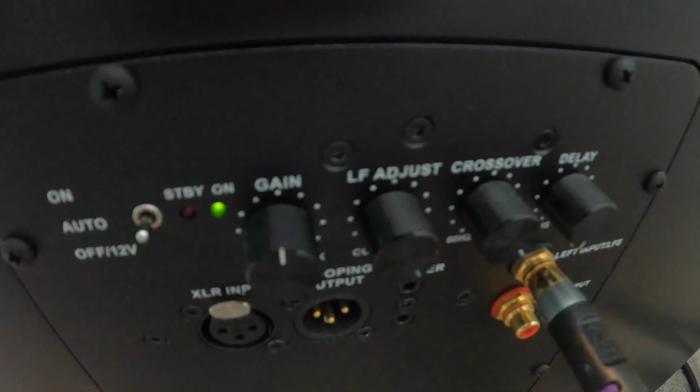So what I'm finding, and a lot of people have been complaining about, is a loss of bass when you run the Anthem. What I found with my Seatons, let me show you on the back of this one. On the back of my Seatons, I got this LF adjust. So if you bump up the LF adjust, if you boost it, it increases the output of the bass. And you have to decrease this when you run ARC, Anthem. You have to decrease this. I run it at flat, but then you can even reduce it more. This actually gives you more of a flatter response.

This boosts a little bit, and then you can boost it all the way up. So when you are running Anthem, it is sensing the increase in bass in the room, it's called room gain. And it was overcompensating, reducing those frequencies that were boosted in the Seaton. When I first got it a couple years ago, I didn't realize this, and I was just losing bass. Finally I learned, let me lower this boost, and then after ARC loads, then I increase it again, and it works fine for the subs.

So the Rel don't have that problem. The Rel are putting out a nice signal, a nice line. So Anthem doesn't give that problem, it doesn't have that problem. And the gain, you keep it pretty low on the gain, so it doesn't get as much room reinforcement. You got to make sure that you just dial down the gain on the subs. So when you dial down the gain on these subs, the room gain is lower, and it doesn't overcompensate on those.

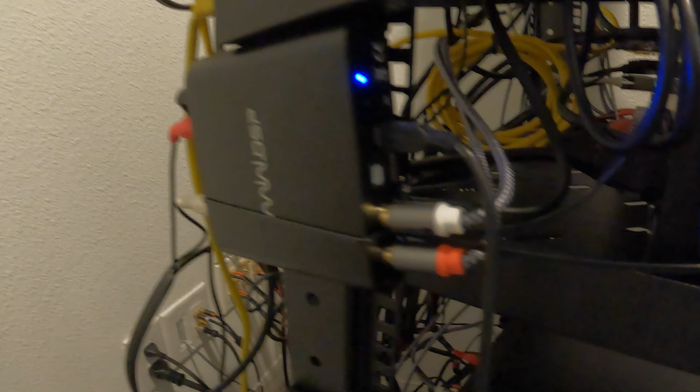So what I did - let me show you. I thought about it, and let me move my guy over. I put a MiniDSP in between the Anthem 1140 and my 525.

I'll edit the video and show you what I did. I boosted it on the parametric EQ - I boosted 10 dB at 50 hertz.

So what it does is create a line like that, and then it boosts the bass. And that worked - it brought it back. Now you can see on the REW graph, the bass is above, and that's what we want.

So I'm going to go ahead. What I think we can do is use the MiniDSP to trick the Anthem, because with the MiniDSP, from 100 hertz to about 500 hertz, the line is above the reference line. So we don't want that.

We want that line to be flat all the way, and then I want a little boost around 80, 70, 60, 50 hertz. So that's not a good curve - it sounds good, but I know it could sound better.

So I'm going to show you guys what I'm doing. I'm going to reduce the MiniDSP by 10 dB below reference, and then rerun ARC. My thinking is ARC will see that decrease in bass and try to restore it 10 dB - it'll bring it back up.

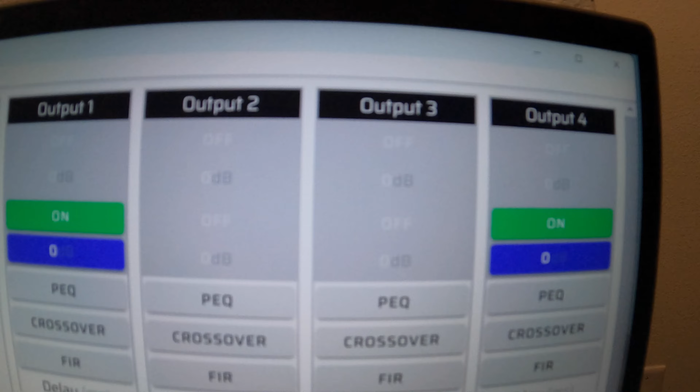There we go, parametric EQ and everything. So I have it on output 1, output 4, and I am using input 1, input 2. Since they're stereo speakers, I got input 1 on output 1, and input 2 on output 4. I just did it that way.

But anyways, so this is what I was saying. You got your PEQ for each, so I'll show you what I did. I'll open up the PEQ. So for the Martin Logans, as you can see, we're here at the 50 hertz. I did it just before, like a 49, 48, whatever it is. I boosted the output level by 10 dB, so that it would give 10 dB of gain to those frequencies.

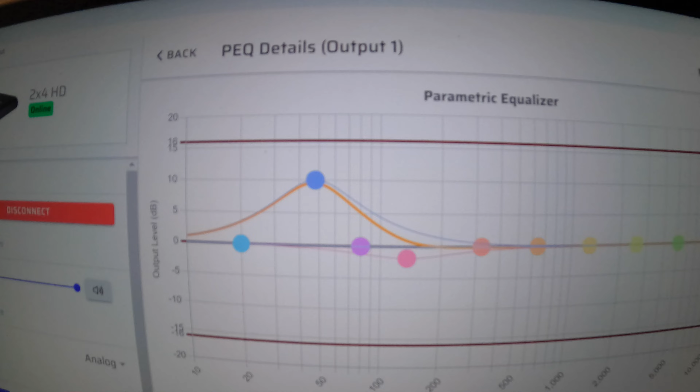Okay, so as you can see, all the lows from 100 hertz are boosted. I don't care about the 100 hertz so much, I'm more interested in that 80 hertz, 70 hertz, 60 hertz, and 50 hertz. But the problem is, as you can see, the line is boosting above 100, and we don't want that.

So that's what I'm talking about. I'm going to go ahead and reset the default here. It says, oh, I gotta unlink the channel. So what I did is I linked output 1 and output 4 so they would be identical. I'm going to unlink them now. Please confirm breaking the link. Now I'm going to reset the default, and see, as you can see, it put the EQ at 0. See, it's all at 0 again.

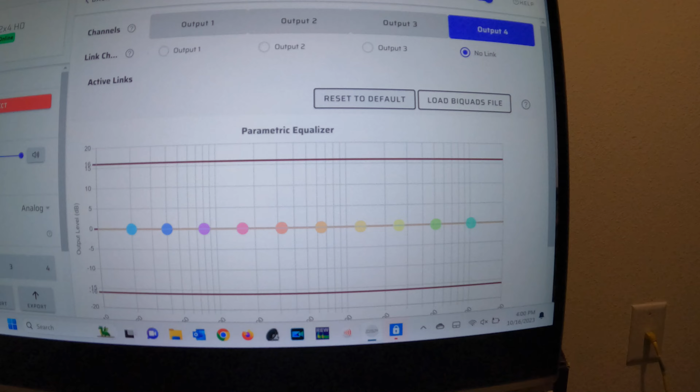But now I have to do the same thing for output 4. Output 4 and output 1 were linked. Now I unlinked them and reset to default, and as you can see it resets them to default. Okay, so now what I'm going to do is link them again. I'm going to go to output 1 and link it to output 4, so whatever changes I make to output 1 automatically will be sent there. So I want to link them, and I'm going to do the same thing.

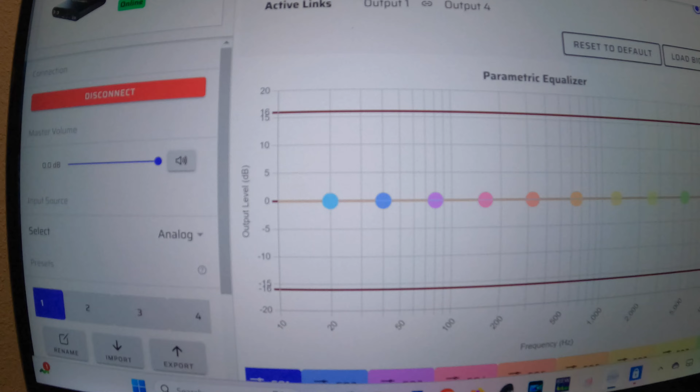I'm going to do it at the 50 hertz mark. Sorry guys, I'm trying to show you this with one hand. I'm going to go ahead and set that 50 hertz mark down 10 dB. So hang on one second. I don't have a little stand with me for my camera, so I'm going to try to do this with the mouse.

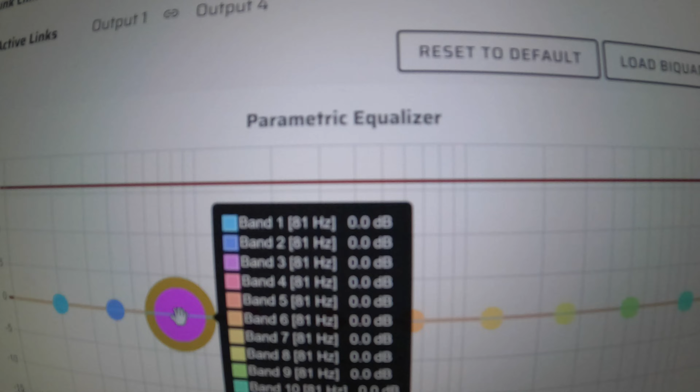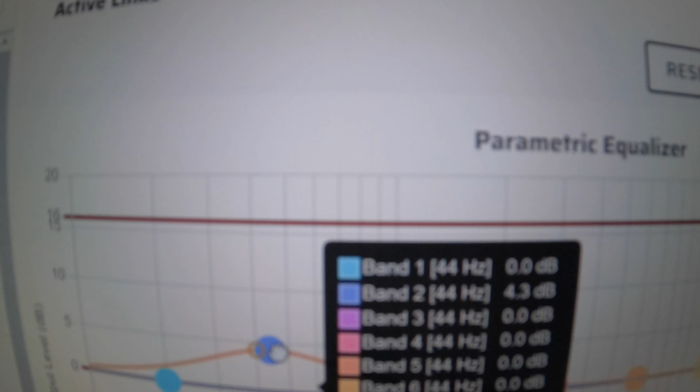So that's 80, that's all like 80 hertz, and I don't want to do that. I want to do it over here, at, that's 44 hertz. So I'm going to bump 44 hertz over. Oops. Yeah, so it's a little hard trying to do this with the camera going, just so you know. I'm going to go ahead and reset to default.

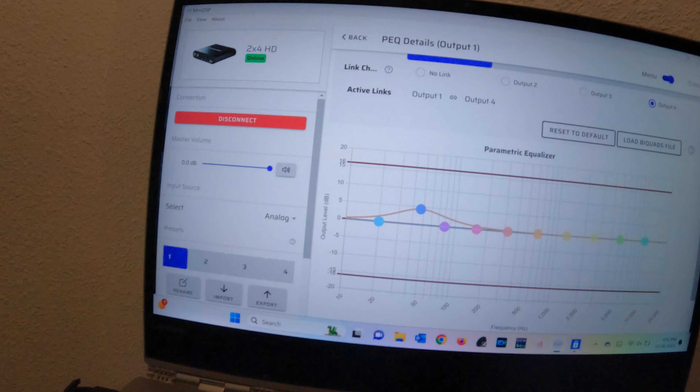So hang on one second. Alright guys, so I had to play with it without the camera. I wanted to show you guys me doing it with the camera, but it's kind of hard to hold the camera and fine tune this. It is very hard because you got to move these things. So as you can see now, I got the 100 to 200 hertz fairly level now, back to the reference. You know, I call it reference, or just 0.

But as you can see, I got it bumped up at the 50 hertz. I got it bumped up like, what does that say? About 6 to 7... I keep getting it wrong. 6 to 7 dB, guys, at around 50 hertz.

So I'm going to try this first. Let's run Anthem. I'm going to go ahead and rerun ARC on the fronts alone, because you can do that. I'll show you guys when I run it. I'm going to disconnect it here and go in the front so I can hook up the mic and everything.

Then let's see what we get. Hopefully it gives me the gain, because I got that line fairly flat now, 100 to 200, which is what I wanted. I didn't want any gain 100 to 200, I only wanted the gain in the lower frequencies. So let's try this out. Camera is getting hot, overheating, so I'm gonna have to turn it off anyways. I'm gonna get this out, put another battery in, and we're gonna run it live with you guys, then we'll check REW after that. All right, so stay tuned.

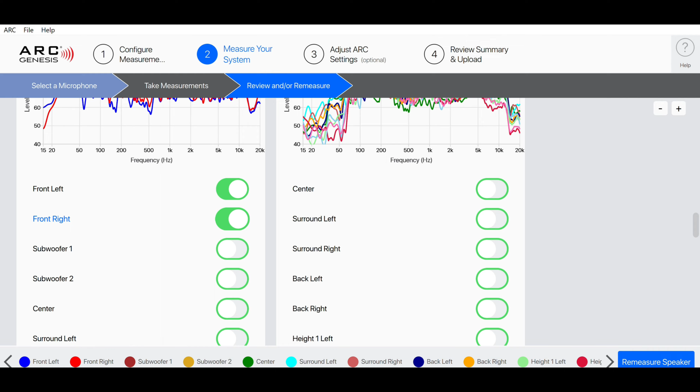Alright guys, let's try that again. For some reason the fronts weren't working, so I just went to check to make sure everything was connected. It was connected, I don't know why Anthem wasn't working, but let's try it again. Choose the device, connection complete. Let's try it now, let me bend my screen.

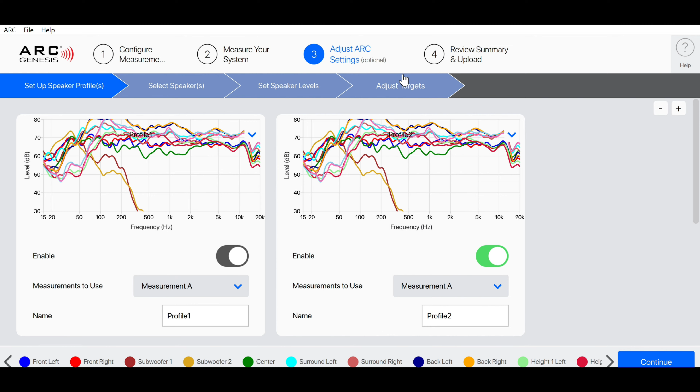So when I take off the MiniDSP, it should automatically put the bass there. So I'm going to, hold on one second. I had a second profile off. Yeah, here it is. So I'm doing this on profile 2, which is this one here.

So the fronts, now I'm going to run flat. So it peaks, the bass comes up here, starts out here. Since I don't have any protection on it, I shouldn't run it flat. I should run it about a second like this, so it doesn't put out as much bass until it gets up to here, about 50. Because the speakers are only capable to 37, I believe, I don't want to put too much lows to it.

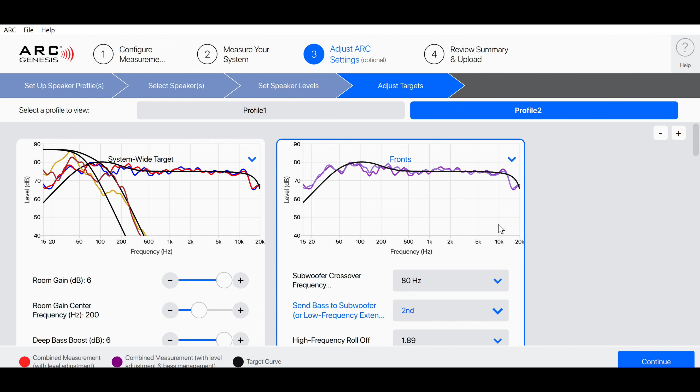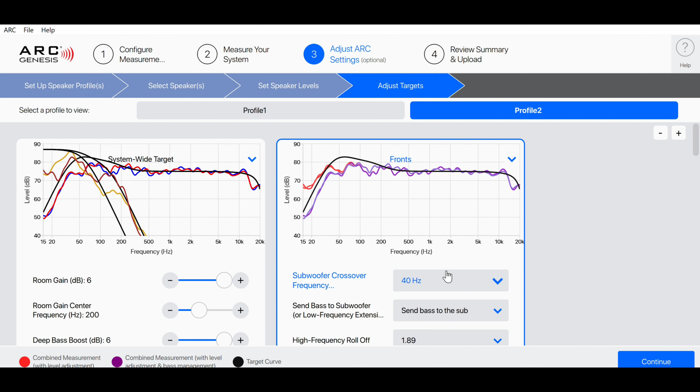And then the subwoofer crossover frequency, I want to put that as low as I can. Well, no, I don't want to put it as low as I can, I want to put it here, like I said, at 37. And then the second here, actually let's send bass to the sub, let's put it at 40 hertz, and let's see how it sounds now.

So what I was doing before, I was setting this to flat because I was trying to get as much bass to the fronts as I could. Well, now that we know we should be getting it, let's do it the correct way. Let's do a 40 hertz crossover, and then send bass to the sub, and then we will see how REW sounds. So I have sub 1 at 70 hertz, and sub 2 at 130.